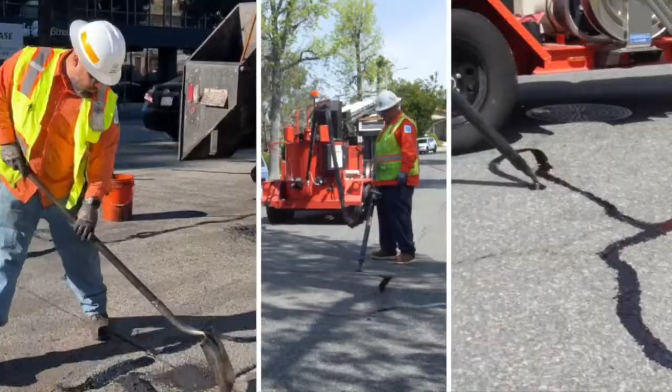Okay, we're going to make sure that we have sound before we proceed. We have some concern that there may not be sound on the system, so we'll wait just one moment to confirm that.

Wonderful. Good evening, everybody, and welcome to the Infrastructure Oversight Board meeting held on Thursday, June 26, 2025. We will have a session of public comment. If any member of the public would like to speak, you'll have a total of 3 minutes. If you're here in person, please fill out a comment card. And if you'd like to comment over the phone, the number is 818-238-3335. And we will connect you when the public comment period begins.

So we will start with a flag salute. And could we have the roll call? Armin Avazian. Present. Maria Coronado is currently absent. Dwayne Gilmore. Present. Linda Bussin. Here. Jean Schomburger. Here. Shane Weber. Here. And Colin Hoffmeister. Aye, here.

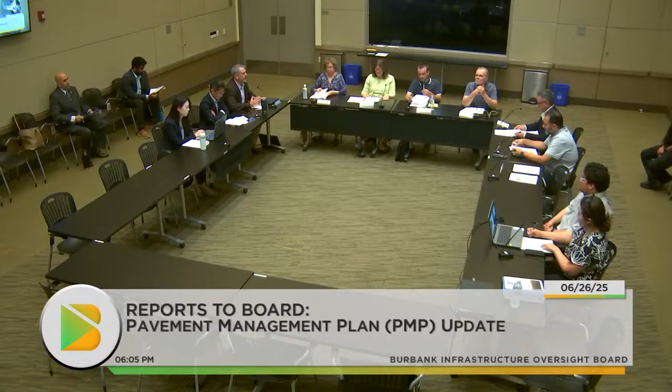Yes, thank you very much. Madam Chair, board members, this is really an exciting report for me personally: our pavement management plan update. If you saw the report that I provided to council as part of our annual budget presentation in May, at the end there, I had an unveiling of a pavement condition index for our entire city of 73. And to emphasize how great that is, my 30 years of experience with cities and paving is a very near and dear thing to my heart. A 73 is really a great sweet spot for Burbank.

I always like to say the council and the residents were very wise to propose and move Measure P because it found the funding to do these types of improvements along with all the other parts of our capital program. So we appreciate your support, and without any further ado, I'm going to call up our principal civil engineer, Artin Megadician, who is the Wizard of Oz behind the curtain that's taking care of all of our pavement in our roadways and alleys citywide. So Artin, thank you.

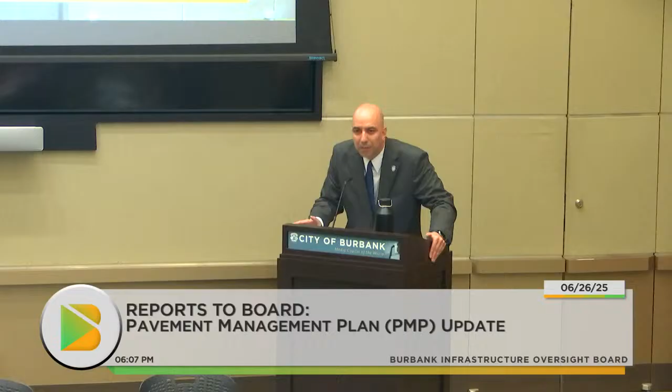Okay, so what is a pavement management program? It is a budgeting tool that assists us make cost-effective decisions, and it answers the following questions. What does the city own and maintain in the street network? What condition are those streets in? What repairs are needed and when? And what is the cost to maintain those streets? So we have 280 centerline miles of roadways, of which 50 miles are alleyways and 230 miles are streets. And the software that we use for our PMP program is StreetSaver, which is an industry standard software used by a lot of local agencies in California.

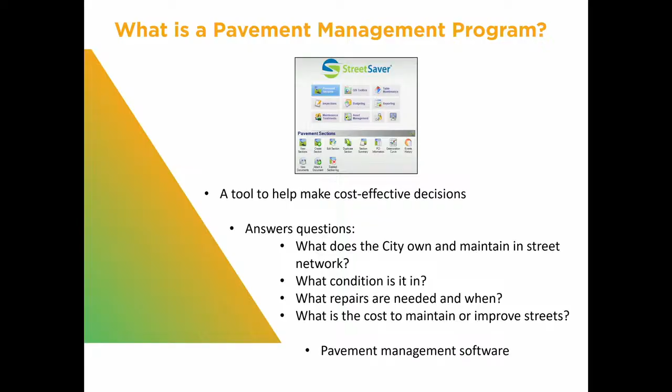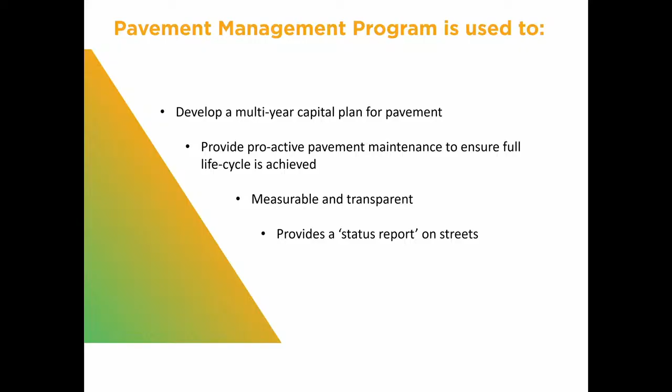So a pavement management program is used to develop a multi-year capital plan. It provides proactive pavement maintenance to ensure the full life cycle of each street segment is achieved. And it also is measurable and transparent. Actually, we are finalizing our 2025 report, and we will be publishing it to the city's website in the next couple of weeks, so it will be available to the public. Everyone can access it and check the rating for their street segment. And it provides a status report for the streets. So how is the pavement condition assessed?

Streets are assessed by trained technicians. And we did two types of assessments this time. We did windshield inspections, and we performed walking inspections. And they're both performed per the ASTM D6433 standards.

So for the windshield inspection, we perform those for streets that are relatively in a good condition so that there are no cracks to measure. And the walking inspections, the technician from NCE selects a 10% sample that best represents that street segment, and, as seen in the picture, they measure the area of the cracks and the severity of the cracks, and they input that information into our StreetSaver program to get that pavement condition index rating for that segment.

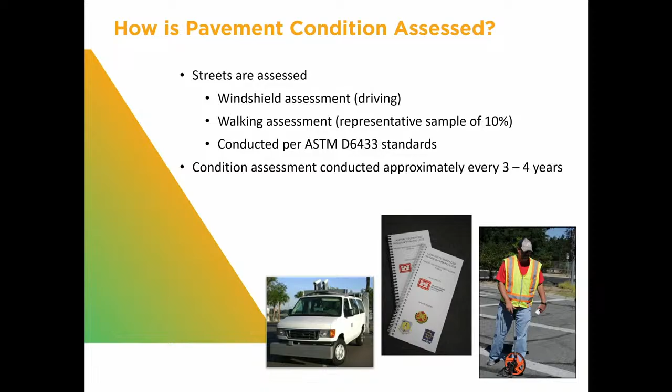Our condition assessments are conducted approximately every 3 to 4 years. So the last time that we had completed ours was in 2021.

This slide shows a few various types of cracks. We have alligator cracks, which show basically base failure. We have block cracking. We have longitudinal cracks. We have patches, and some of those patches have been done by utility companies, and if we notice that they're failed or damaged or in need of repair, we check the permits that we have to see which utility company it was done by, and then we notify them to return and repair the patch.

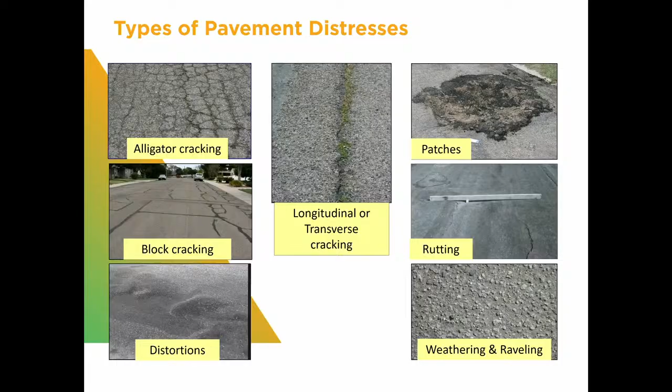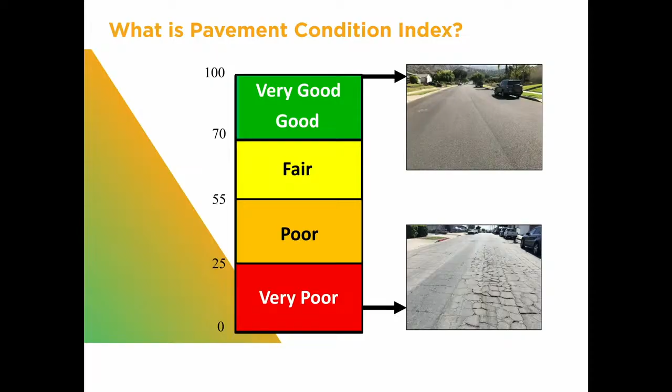So the next 4 slides, we will be looking at those 4 different condition categories. This one is a street segment in the good to very good condition category with a PCI rating of 100. An example of this street would be Victory Boulevard from Verdugo to the city limit at the city of Glendale, which we just completed paving this month.

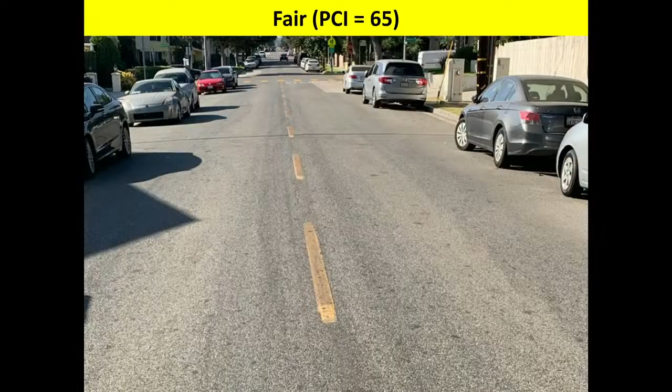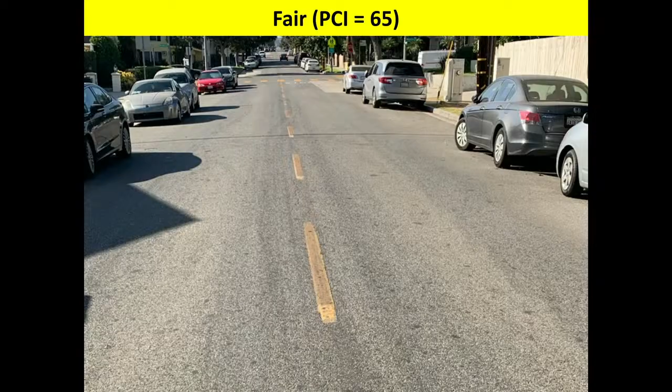Next is a street segment in the fair condition category with a PCI rating of 65. As we can see, some weathering has taken place and the longitudinal cracks are starting to develop. And an example street would be Verdugo Avenue from Victory to Lake Street.

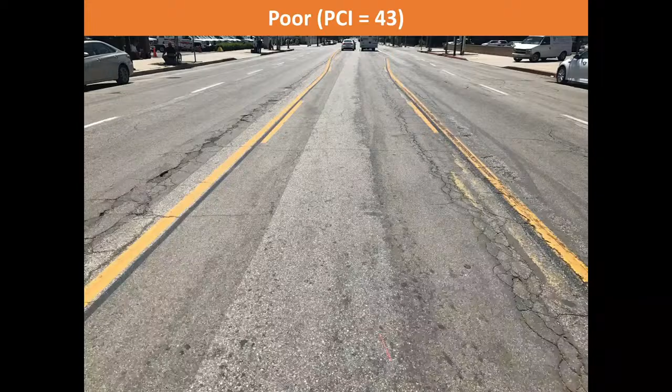Next is a street in pavement condition category poor, and as we can see, there's longitudinal cracks, block cracking, and alligator cracking starting to develop. And an example street segment would be Hilton Drive from Eaton to Camp Ridge.

And this is a street in the very poor condition category with a PCI of 13, basically a failed street that needs to be reconstructed. And an example street would be Haven Way from Brace Canyon to Joaquin, which we are improving this year.

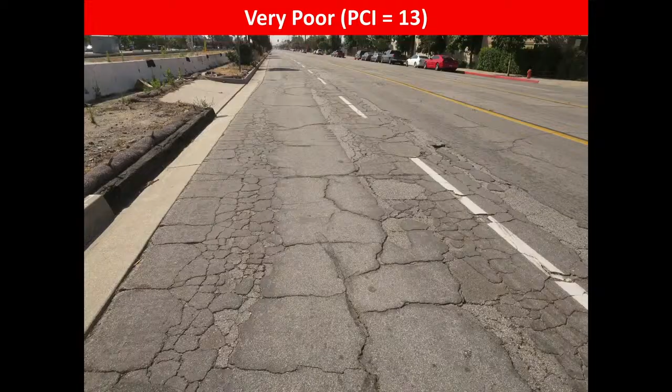So this slide shows the sample deterioration curve, or what we also call the life cycle curve for each street segment. So we have over 2,700 street segments in our network, and each one of them has one of these curves. And it is unique to each street because it depends on the location of the street, the traffic index of the street, and the subgrade that's under the street.

First, I would like to explain the horizontal axis. That's time in years, and there's no numbers because it is unique to each street. And that $4 to $5 is basically showing that if we wait until the street is failed, it would cost us 4 to 5 times more than it would have when the street was in a relatively fair or poor category, which we could repair by thinner resurfacing methods or even crack sealing and slurry sealing.

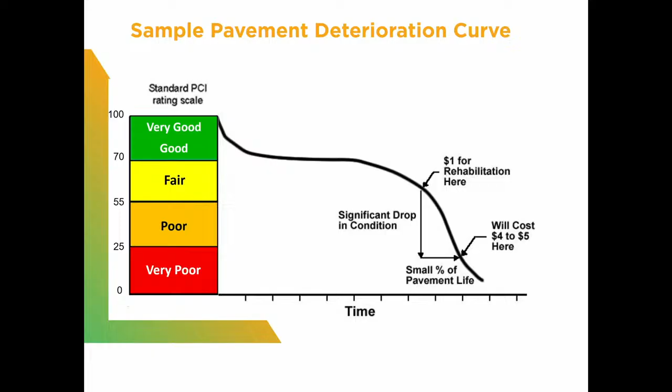In 2021, we increased that PCI substantially to 65, and that's a 14% increase, which is a substantial increase in terms of PCI. And I will show you in the next slide where we were.

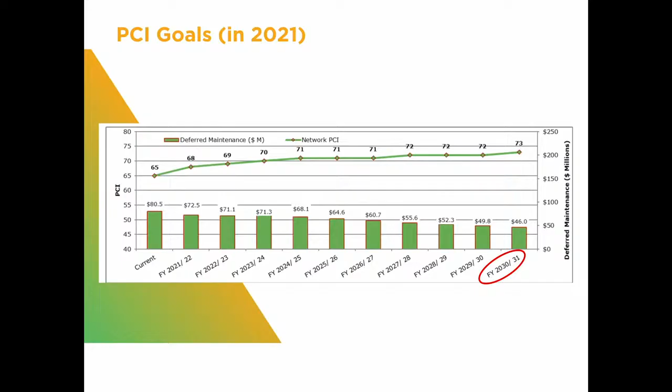So in 2021, we were in the fair category, and by that time, we had already received the Measure P funding. So with that infusion of Measure P funding, we were able to repave more streets. And the goal at the time was to get from a PCI of 65 to a PCI of 73 in 10 years, which we achieved 5 years earlier in 2025. So that's the good news.

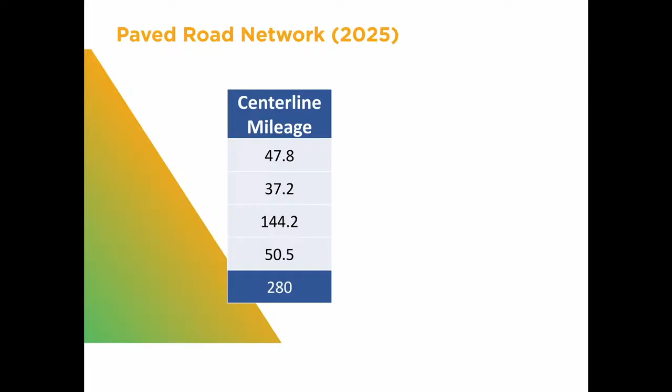But actually, a good point. So we can look at each of our functional classes. So the arterials are at a 75, collectors are at a 76, and residentials are at a 79. And the alleys are at a 44.

And Arden, if I may. So the interesting thing about that slide, something that you've heard in our annual CIPs the past 4 years, I believe, there was a single segment alley that we did as a pilot. I think the next year we did 5, and I think last year we did 20 segments. And that's important because, as you see from our PCI, the alleys are in

bad shape. And that's mostly because of the prioritization of all the citywide streets to hit the arterials and our residential first. But the gains that we've made in the residential areas and the arterials allow us to bring some money into those alleys. So I know over 5 years, we've had a good handful of alley complaints. And you might recall we focused on alleys where there is typically pedestrian traffic as well. So I talked long enough to let that 73 sink in, so thank you.

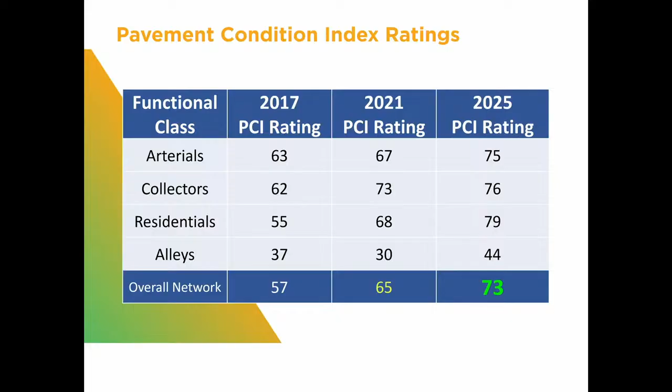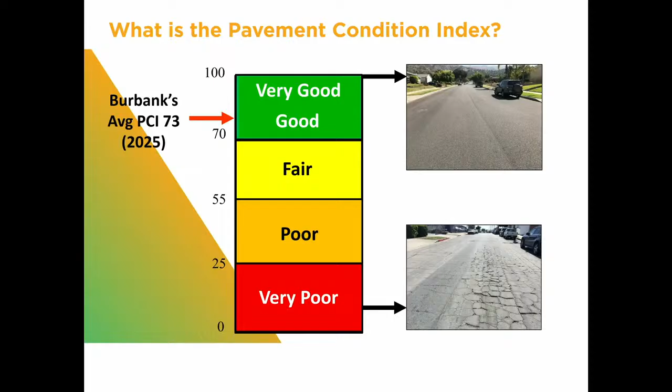Okay, so we're at 73 now in the last condition category of green, which is good to very good. And so how do we compare to other cities? Actually, in 2021, we were below the state average of 66, I believe at the time. Now the state is 65, so we're above the 65, and we're even higher than our neighboring cities of Pasadena and City of Los Angeles.

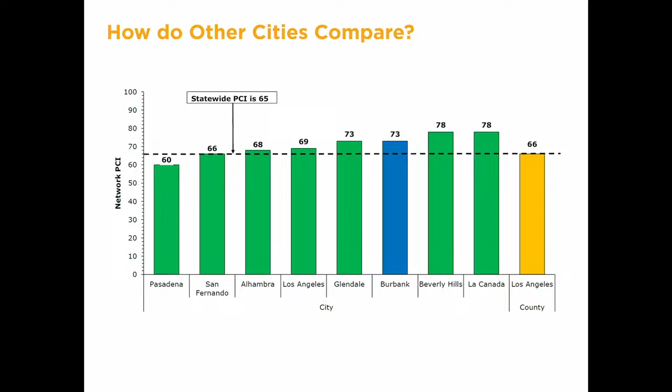So just a quick background, in 2010, 2011 is when we started our 10-year first cycle repaving project, and started with 2 zones. We had divided the city into 20 maintenance zones, and the goal was to repave the poor and very poor streets in 2 zones every year for the next 10 years. And we had, I believe, about a $1 million budget to address all of the streets, which wasn't possible, so we had to design and construct to the budgeted amount and then move on to the next year's streets. So we basically addressed the worst of the worst streets at the time.

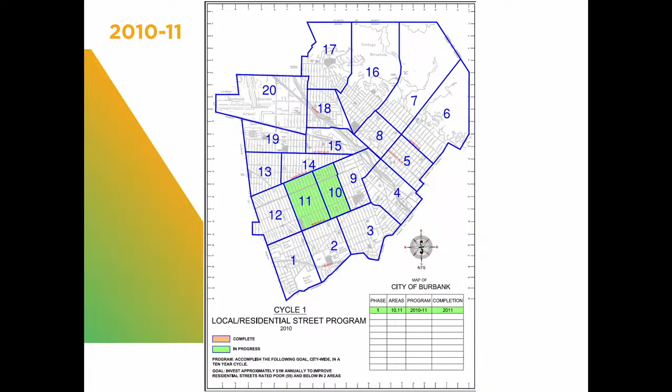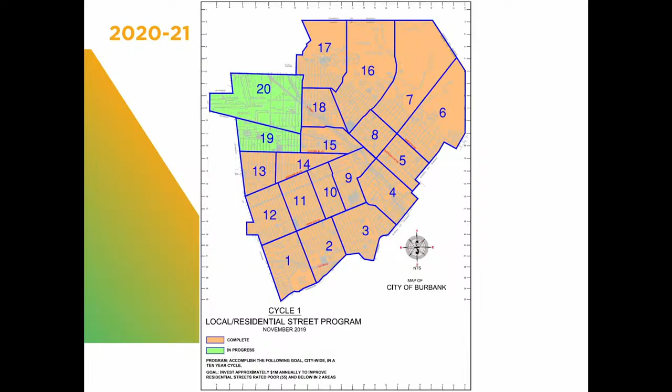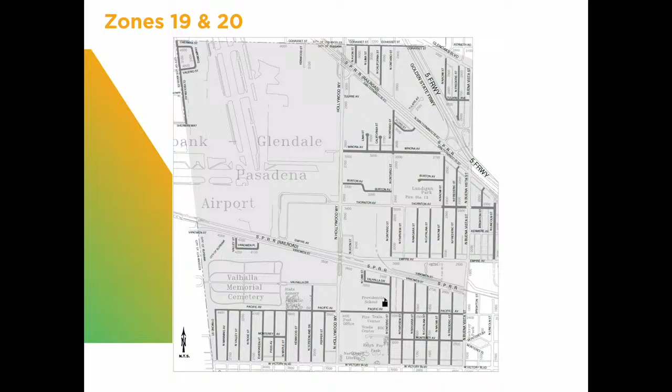And in 2020, 2021, we completed the 10-year cycle, and at that time we had actually received the infusion of Measure P funds, so we were able to do a lot more paving than the first phase of that project. And this is zooming into those 2 zones, 19 and 20, and the actual location map from the project showing that we were able to repave almost every single street. And those were the streets that were in a poor and very poor condition.

So the 10-year cycle was completed, and then we had the Measure P funds, and our goal was to reach the 73. So we decided to implement a much more aggressive paving program. So we decided to go with a 5-year. We called it 5 to 7, just in case we couldn't finish in 5. But the good news is we are on track to finish within 5 years.

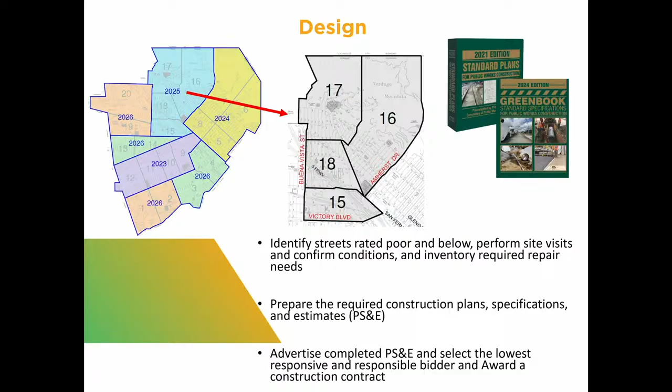I will walk you quickly through our design process and construction. So basically we identify the streets that are in a poor and very poor condition. We perform site visits to confirm those conditions, and we take inventory of any other item that may be in need of repair, such as the concrete items of curbs, gutters, sidewalks, and pedestrian curb ramps. Next, we prepare the plans, specifications, and cost estimates, advertise the project publicly, select the lowest responsive and responsible contractor, and then start the project.

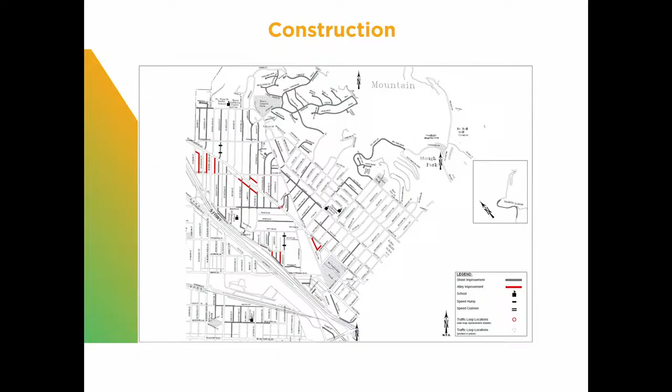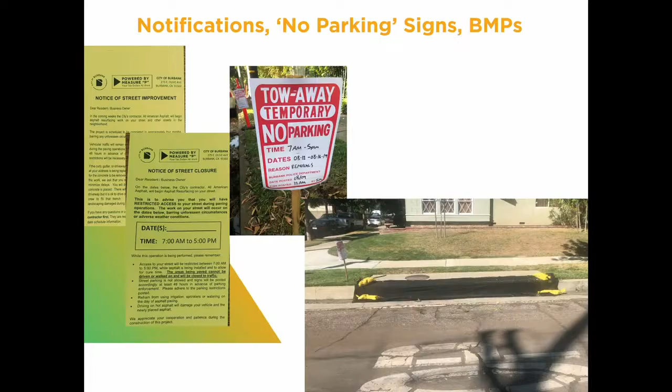So this is the actual project location map from our upcoming project in the Hillside area, which is east of Amherst Drive. So once the contractor is selected and the notice to proceed is issued, they start with the notifications, they install no parking signs, and start implementing BMPs, best management practices, by covering the catch basins or any openings or drains to our storm drain system. And then concrete work is scheduled.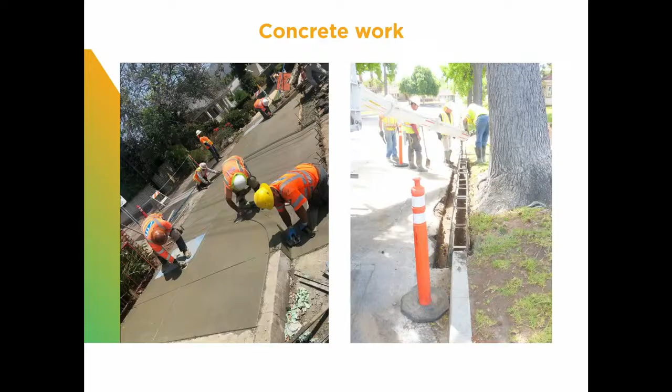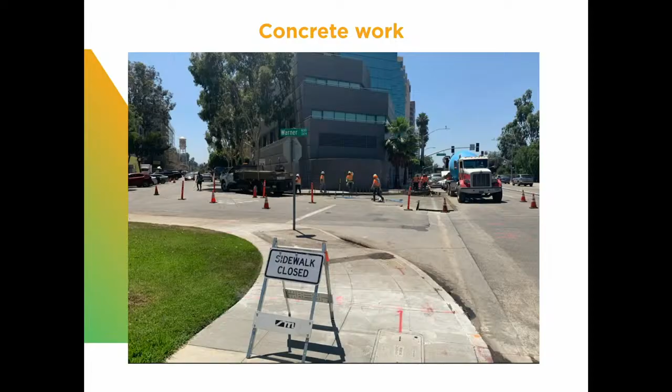In this slide, we can see curb reconstruction, alley approach reconstruction work, and cross-gutter reconstruction work. I'm including this just to show that some locations can be complex, and this cross-gutter required traffic control on both streets, and we are constructing it half at a time to provide access to the side streets, so we have 1 lane open in each direction.

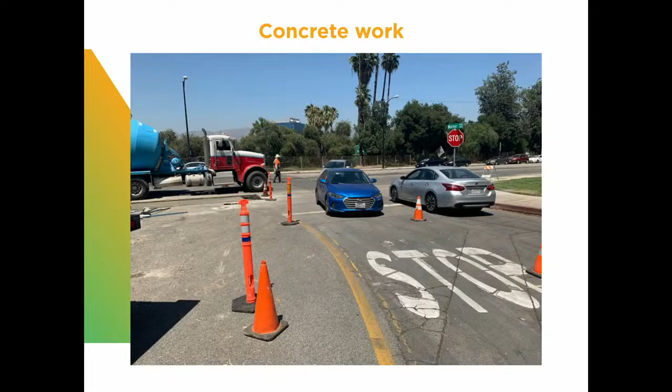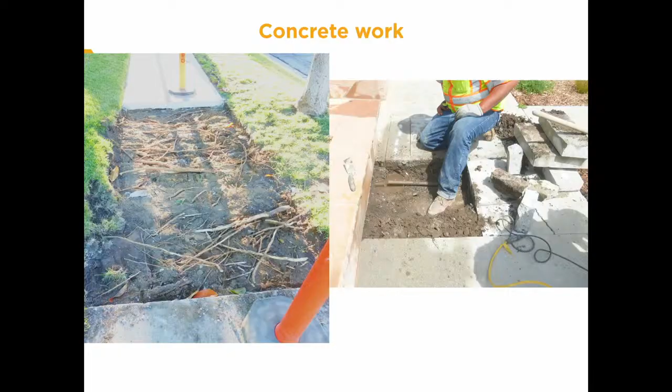With concrete work comes unforeseen conditions, and we run into shallow pipes that shouldn't be there, should be deeper. We have root issues that we need to take care of. And we also upgrade our substandard pedestrian curb ramps with the blue truncated domes.

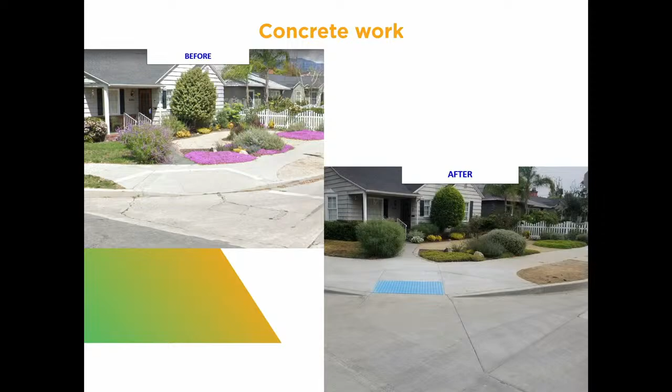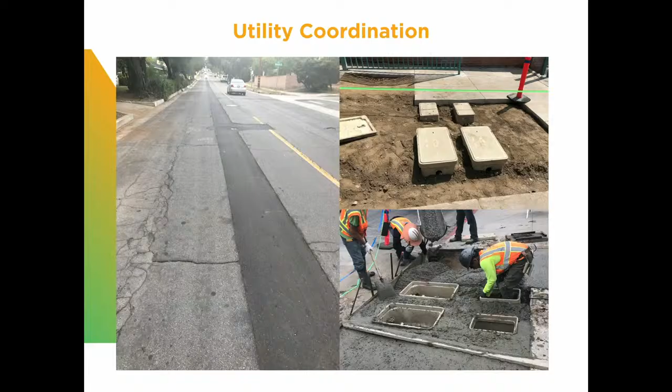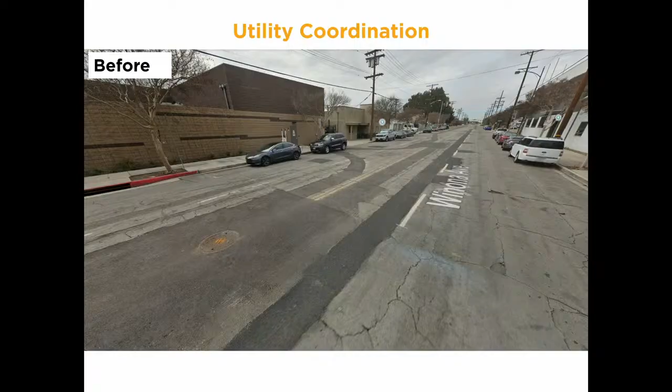Utility coordination is a critical part of our projects, and we work very closely with our utility companies to make sure that they install their pipelines and facilities first before we pave, so that they don't come and cut into our new pavement. And this is a great example: you can see two trenches. On the left-hand side, there's Burbank Water and Power's electrical trench work, and that's their substation. And on the right-hand side, it's Burbank Water and Power's water line. So Public Works and Burbank Water and Power coordinating closely. They completed their work, installed their pipelines and conduits, and base paved their trenches, and then we repaved the entire street.

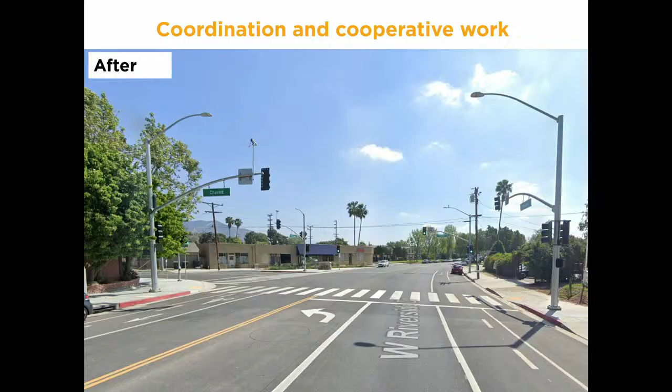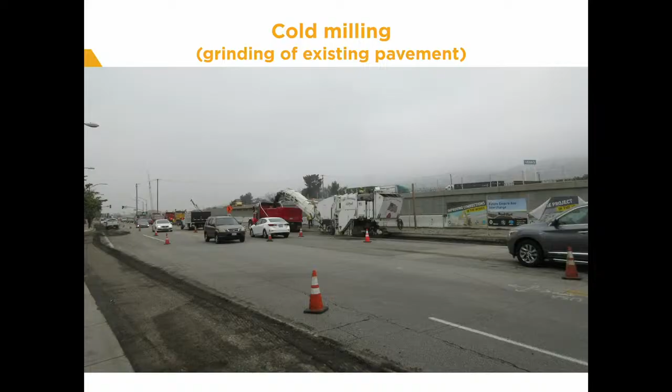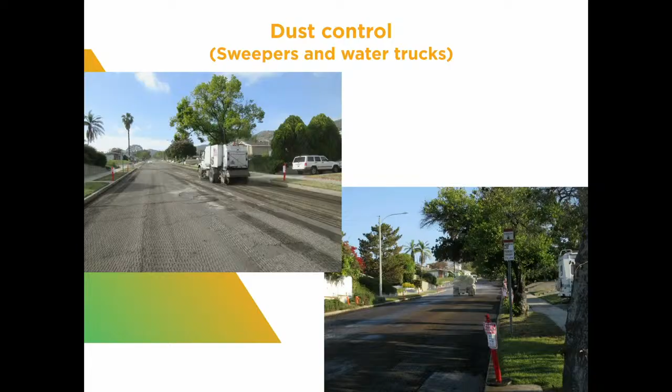So after concrete work is completed and all the coordination work has taken place, the contractor schedules the grinding of the existing asphalt pavement, or what we call cold milling. In this case, there is traffic control implemented with one lane open in each direction, and the contractor is working on the outside lanes. And dust control measures are implemented to minimize dust with sweepers and water trucks.

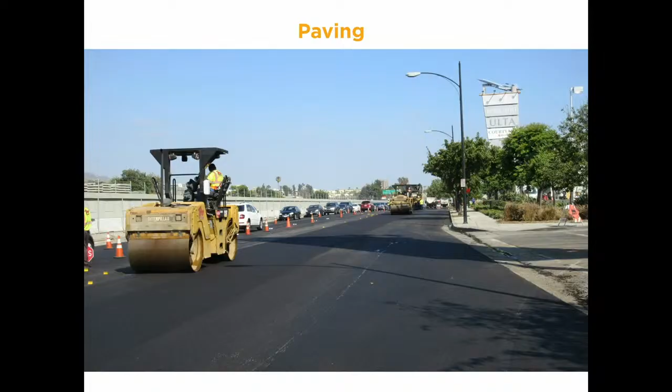And then comes the paving operation, and again, traffic control is set up with one lane open in each direction to minimize impact to our commuters and residents. With the paving work, we installed rubberized asphalt, and we make sure that we get a good quality product from the contractor. So we have our inspectors check the temperature of the rubberized asphalt at the time of arrival to make sure that it is acceptable and within our specification limits. And we also perform, through a geotechnical engineering firm, relative density compaction testing and asphalt binder content testing to make sure that those are also per our project specifications.

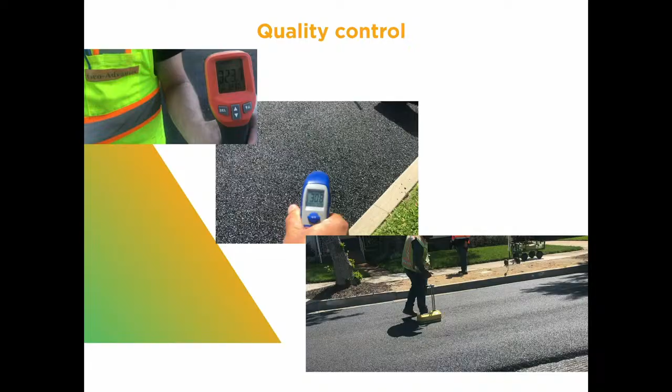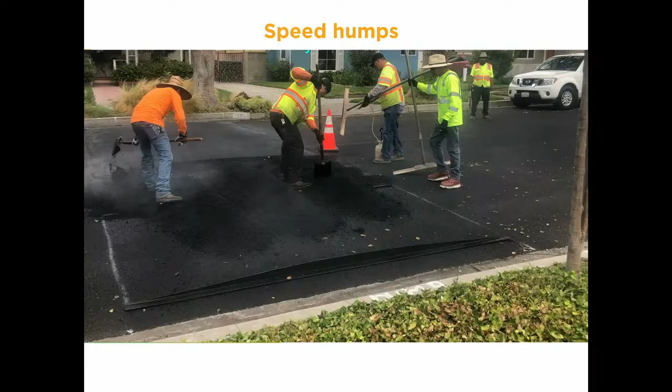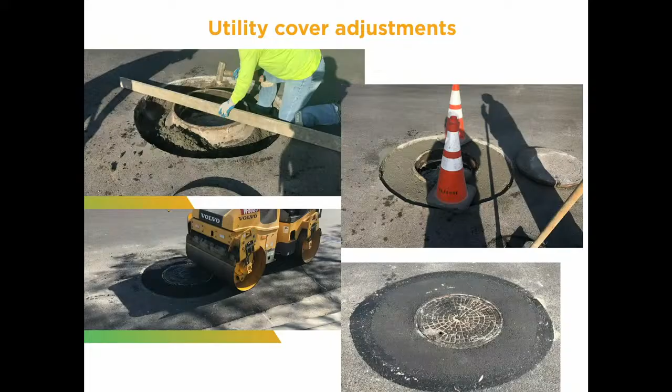Next, some streets do have speed humps, and we construct the speed humps one half at a time to minimize impact and allow residents to access the street. And then speed humps are tamped and striped, and pavement markings are installed. And then utility cover adjustments, which include the sewer facilities and water facilities.

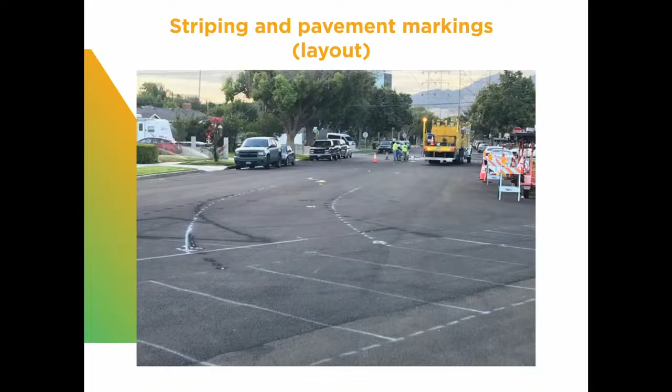And then it's time for striping layout work. The layout work is where the subcontractor lays out the proposed striping lines and markings. As we can see here, some revisions have been done because this layout gets reviewed by our traffic section staff. They review it, provide comments to the contractor, it gets revised, and then the final layout is installed. And after layout, traffic loop detectors are installed.

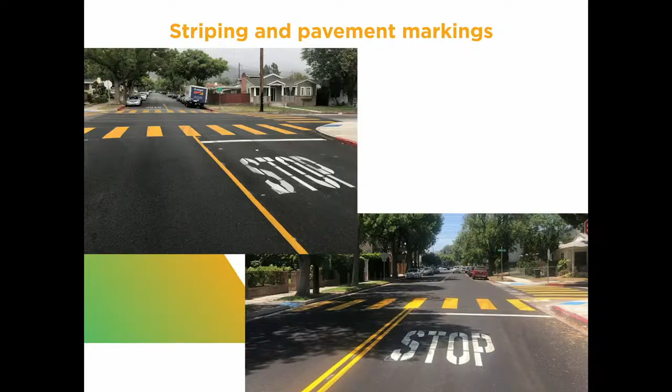And Director Bergman mentioned the alleys, and I just included a couple of slides. So we have been picking up some alleys as a pilot in the commercial areas, where there's a lot of foot traffic, and we have also included some residential ones. We are hoping that in 2027, we would be able to address alleys more systematically, similar to what we're doing with our residential streets.

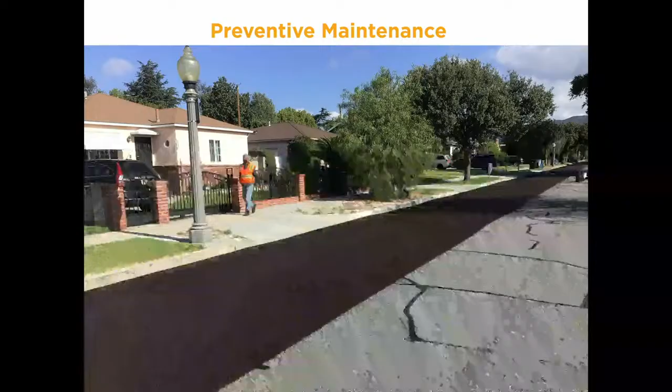Same with preventive maintenance treatments. We're hoping that in 2027, we can implement preventive maintenance measures such as crack sealing or slurry sealing to keep those streets that are already in good condition in that same good condition for longer.

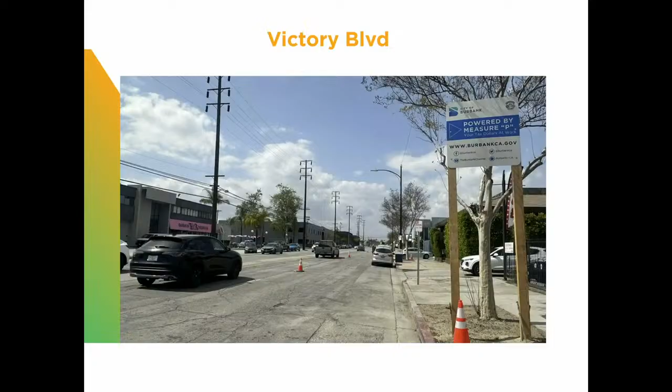And this is a few quick slides for our annual arterial street improvement project, which was just completed this month in June at Victory. And we have the Measure P sign.

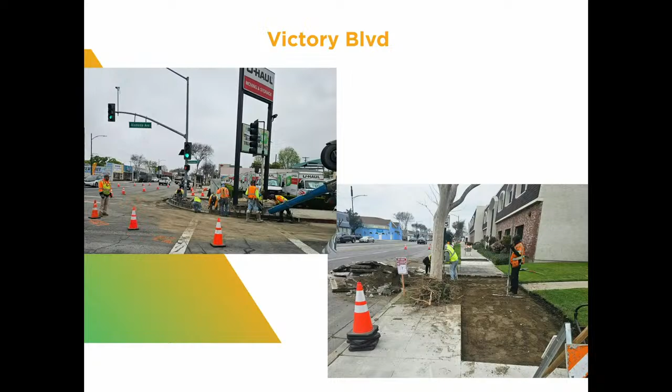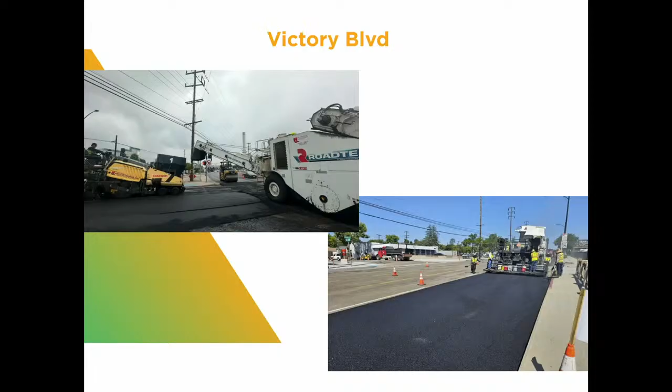Actually, go back. And then same thing, starting with concrete work, curb ramps, sidewalks, curbs and gutters, driveways, and then cold milling, removing of the existing asphalt with temporary striping, and then the paving operations, and traffic loop installation, and pavement markings and striping work, and then the completed street.

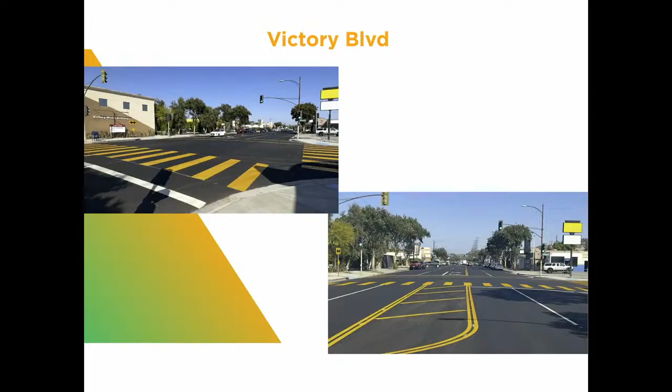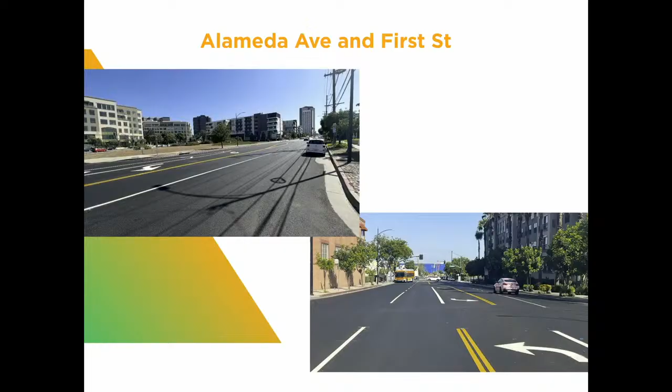Couple of more, and we also included some segments of First Street from Verdugo to Olive, and Alameda Avenue from Lima Street to California Street. So how much is needed going forward?

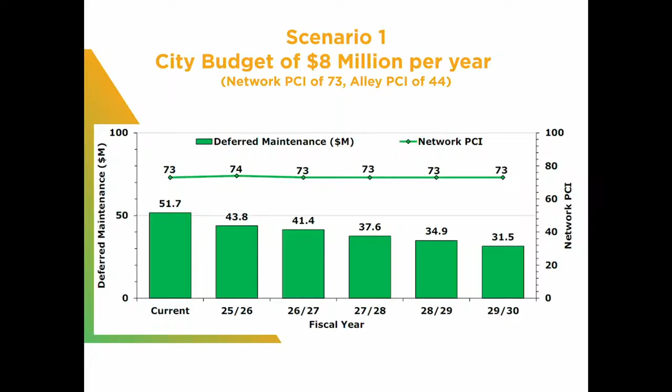So we looked at a few different budget scenarios and decided to present these top 3 choices. So budget scenario 1 would be to maintain the same network PCI of 73, and keeping the alleys at the same location, 44, which would require the same dollar amount of $8 million. Scenario 2 that we analyzed would keep the network PCI at 73, but would increase the alley PCI to 55.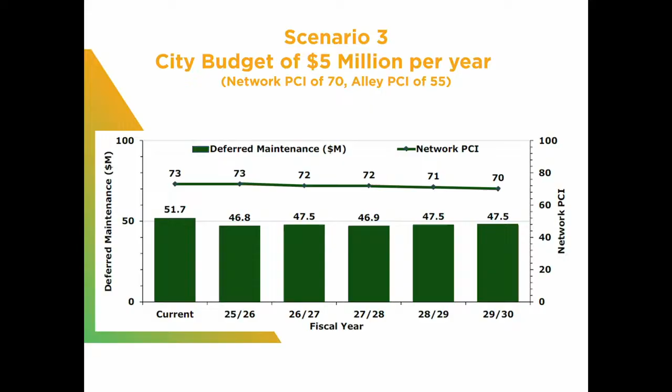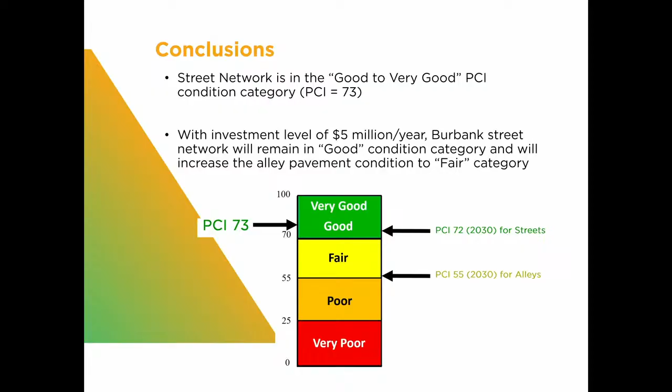So conclusion, street network right now in a good to very good condition with a PCI rating of 73. And we are recommending to proceed with budget scenario 3, starting in 2027, which would be an investment of $5 million a year, and that would keep our streets in a good condition category, and would also increase our alleys to a 55 pavement condition, which would be at the fair category. And with that, I will open to questions.

Great, thank you. That was a very focused and thoughtful presentation. I appreciate it. Thank you. Any questions from the board? Go ahead, please. Good evening. Thank you for your presentation.

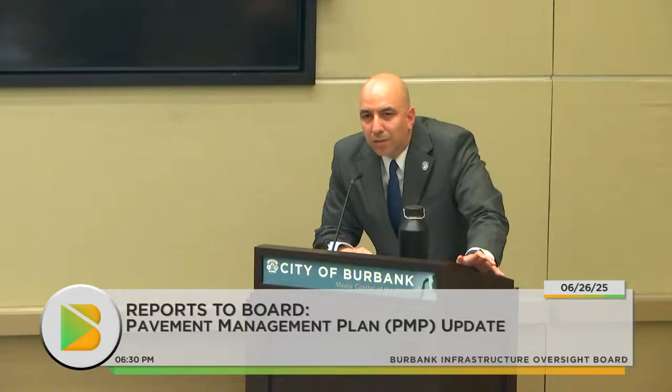I've got a couple of questions regarding crack sealing versus resurfacing. When does the city decide to crack seal or resurface? So crack sealing would be when the streets are in that upper end of fair to lower end of good condition, that we could seal those cracks to prevent water intrusion, basically. So we would be extending the life of the pavement.

So crack sealing is usually for streets that have developed block cracking. So it's just those minor cracks that we would fill, which would extend the life of that pavement by another 3 to 4 years. Okay. With a minimal investment. It's much less expensive to slurry seal, crack seal a roadway to gain 2 or 3 years of life on it. And that's the beauty of where we are in our system now, that we could start considering that minor maintenance type of mode also.

Sure. And then when we are doing projects with neighboring cities, how are we handling that funding? Since Glendale's contractor did that one portion you showed, did we reimburse the city of Glendale for that work? Exactly. So it depends on whose contractor is doing the work. For that specific example, the city of Glendale's contractor was doing the work, so they reached out to us, and it took us about 1.5 years or 2 years just to go through the cooperative agreement, plan preparation, making sure we agree on all the items.

And for that one, we went to council and awarded that, got the cooperative agreement approved. And when the work was completed, City of Glendale basically sent us a bill, and we paid that amount. And we have done this since then for a few other streets, such as Thurber Place, Chavez, Spazier Avenue, and I believe it was 6th Street that we worked with.